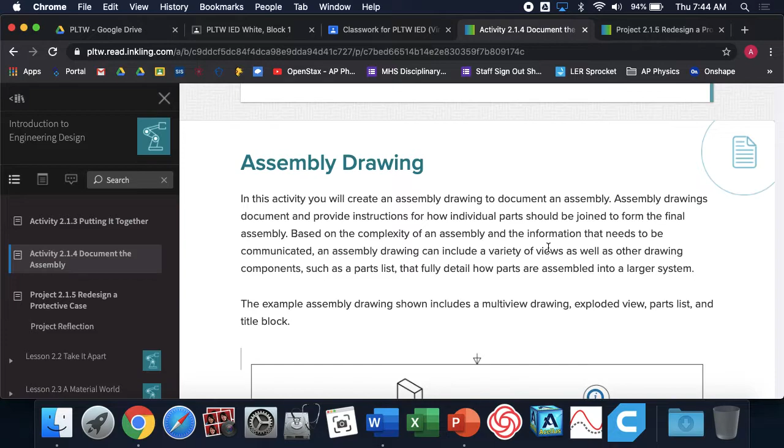So again, I'm going to condense all of the MyPLTW instructions for 214. I'm going to just summarize it for you and show you what you need to do. So you're just basically showing us how to do it today, and that's it? Yes. Then I'm going to ask you to do it, right? I'm going to show you, you'll repeat it.

This is why we should have no excuse not to have late work done. I know, I am doing everything I can to help you guys out. And we have a study hall. Yes.

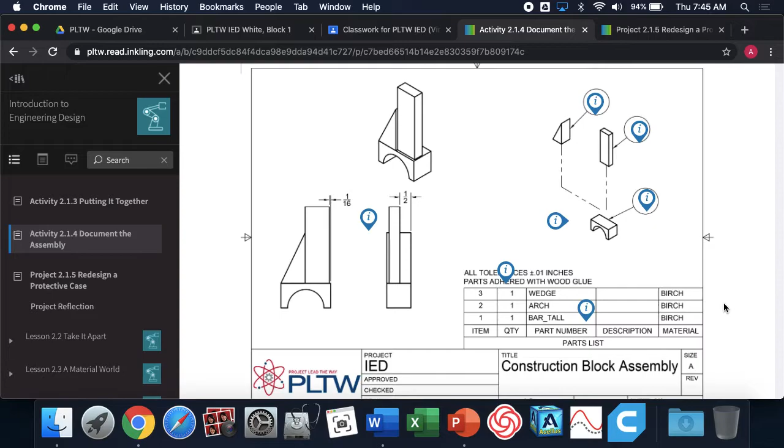If you ever need help, just email me. Mr. H, can I come in tomorrow? Get help. By all means. You can come in and probably spend 10 minutes in my room. I can straighten the assignment out and you can be on your way. Please use that time to come in and get help, get your work done.

So today, this is what we're going to be creating. This is a part drawing, but of an assembly. This kind of looks weird. Huh? This looks weird. Yeah, it's not too bad. The first thing you'll notice, there's multi-views of the assembly.

Well, that's exactly like we're used to. It's just no longer a single part, it's an assembly of parts. We got our front view, we got our right view, and then we have our isometric view. To show the audience, if I give them this, they'll see kind of what this assembly looks like.

I want you to pay attention. I still have dimensions. You see the dimensions on the left side with the multi-view? What is this dimensioning? Is it half of the square on the bottom? Yeah. Is it dimensioning a part dimension?

This half inch is not any part of it. It's the spacing of that part. I'm telling you, this block, the back side of it is half an inch away from the back edge of the other two blocks. These dimensions are the location of the parts.

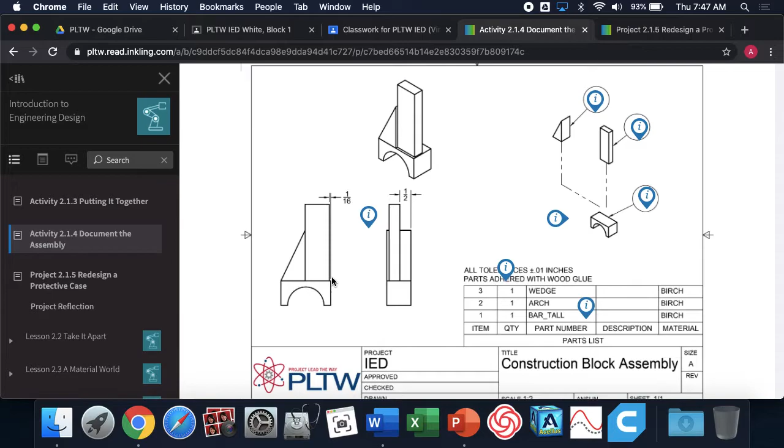That's the first half of it. Over here, does anybody have any idea what this view is called? I don't expect you to know, I was just curious. No, not quite. This is something new.

This is an exploded view. You can tell because the parts that were assembled look like they were exploded outwards. This view shows how the pieces are put together. This block I'm going to put straight down on the base block. This block would come over into the side and attach. It basically blows your part up into all the little pieces so you can see all of them, and then you can also see how they end up getting fit together. So we're going to learn how to make this exploded view.

Down here, this table, you see how it's got part numbers that correspond to the part numbers of your assembly? This is called your bill of materials, or your parts list. In Onshape, they refer to it as BOM, bill of materials. It lists the part numbers and the name of it, and then it labels them on your assembly.

So someone can say, what the heck is part number 1? Well, part number 1 is a bar, tall, made out of birch. You're like, what's this bottom part? Oh, that's the arch. It's also made out of birch.

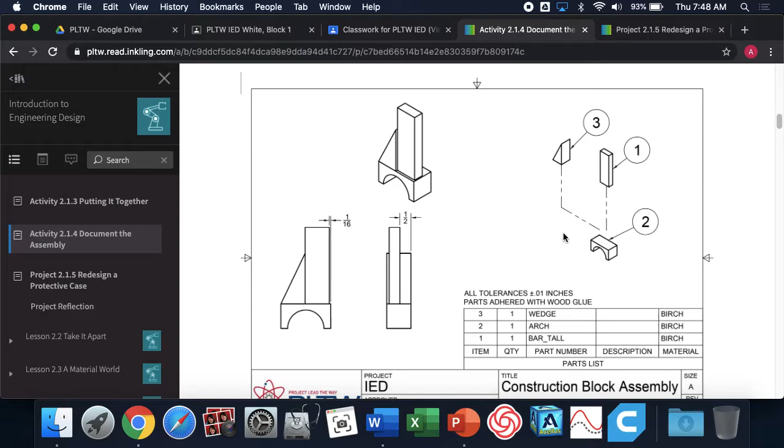I'll show you, don't worry about it. This is the goal for today. You guys are going to be learning how to make this. And I'm going to show you right now how you do this, how you make it look like this in Onshape.

So what I'm going to do is log in. Again, I don't really want you to try and keep up with me. I'm going to go kind of quick and show you where the buttons are and how to do it. And then I'll have you do it yourself. But you'll start with obviously logging into Onshape.

Once we're in Onshape, I'm going to use the selfie stick assembly as an example. What you guys are going to do is get with your partner and work with them using your headphone case. That way you only have 2 parts to assemble, so yours will be a lot simpler. I'm going to do a full-blown version, which is actually kind of annoying for the selfie stick. You can just do it by yourself, it should be pretty easy. If there's problems, let me know after we do work time.

So what I'm going to do is open up my assembly. This is the selfie stick assembly that we made, and I'm going to give you the example using this assembly. The first thing I need to do is make a new drawing. I'm going to use my PLTW template, and it's going to be a blank view, because it's not a part — it can't just spit out the 4 standard views.

And it's asking, what do you want to place a view of? See, there's nothing listed — that's because I'm looking at parts, I'm not doing a part drawing, I'm doing an assembly drawing. My assembly is in this document, so I'm like, yep, I want that assembly.

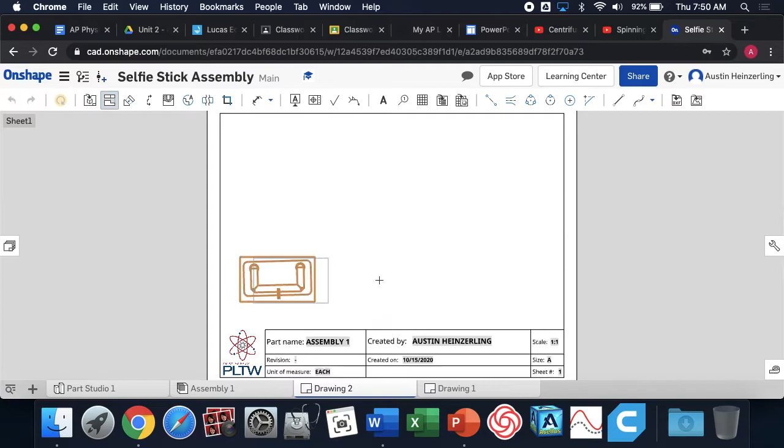I'm going to place a view right here. And then this gets really annoying — there's my side view. Obviously my part is too big for the document. So if this ever happens to you guys, just right-click on the view, go to View Properties, and you've got to change the scale. This image is the exact size that the dimensions are.

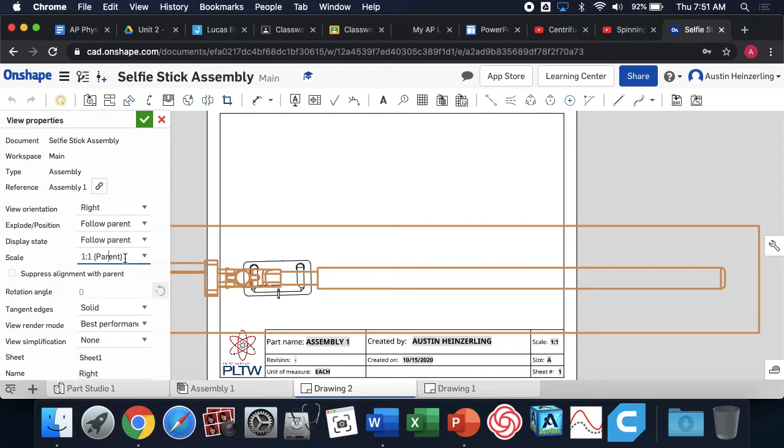It's huge, so I'm going to cut this down to a 1/4 scale. This will be useful in the future if this ever happens to you.

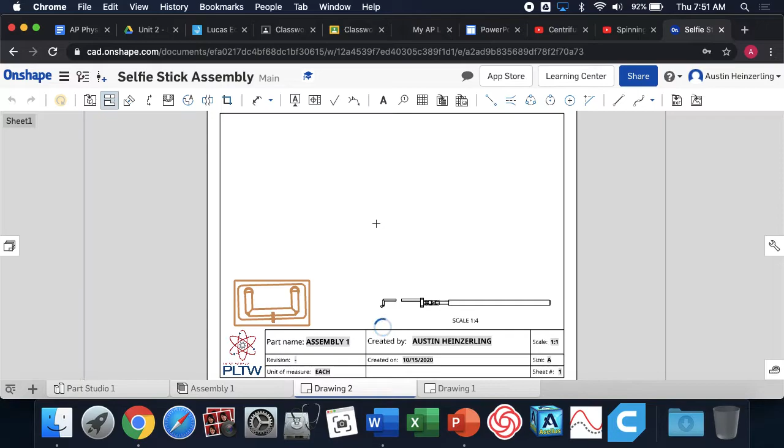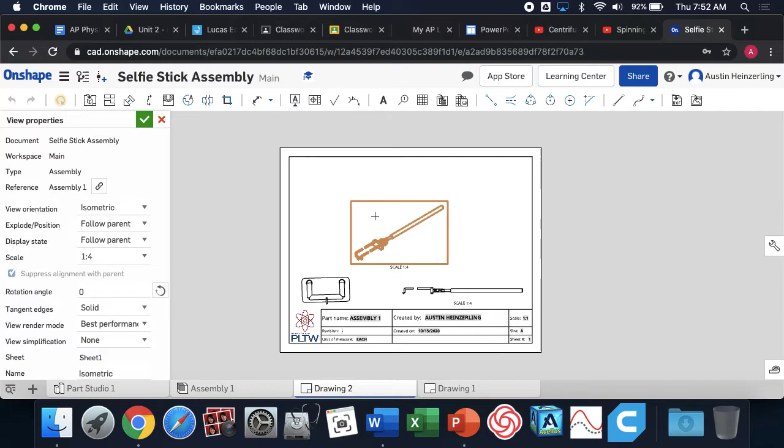And then the main view I need is an isometric view. So I need to insert a projected view using this — I'm going to drag diagonally. There's my isometric view, but it's also much too large. So I need to right-click, view properties, and I don't want it full size, 1:1 — I want it, let's say, 1/4, right, 1/4 of the size of the actual part. I'll confirm that and move it up here.

So I've got my multi-views placed. I want to point out on Classroom, this should have populated your assignment.

I summarized, I gave you some resources, I'm going to show you what I need in your drawing. Right now, I have the multi-view. I'm done with that. I need dimensions to specify the positions on my multi-view.

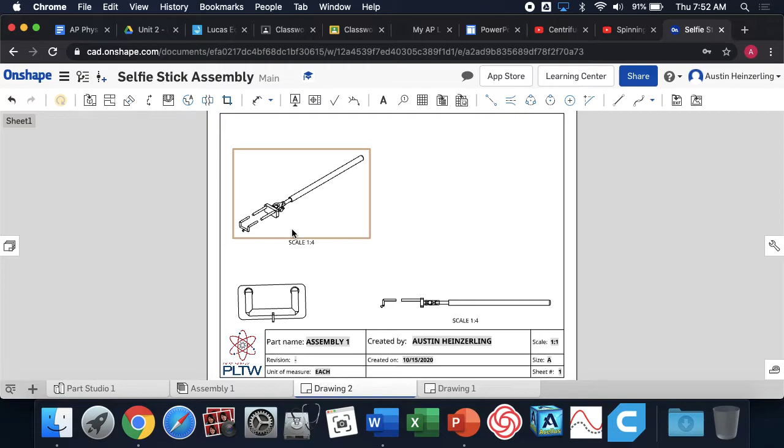Now, I'm only going to do a couple because this is actually a really complicated assembly to do all these little dimensions. For example, over here, I'm going to dimension and say the end of this component - I want to start by assembling it over here, 1.105 inches away from the base of the handle.

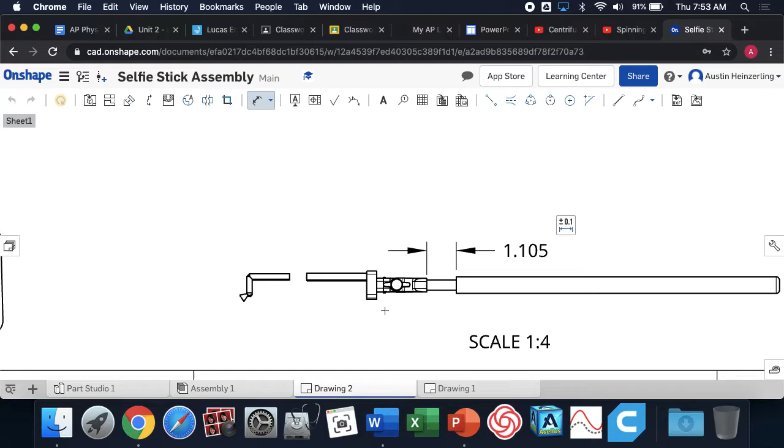I'm telling you, when you assemble it, you should locate these parts in this way, put them this close together. Again, this is a really hard one to dimension. Here's a good example: where should I assemble this slider, the bracket.

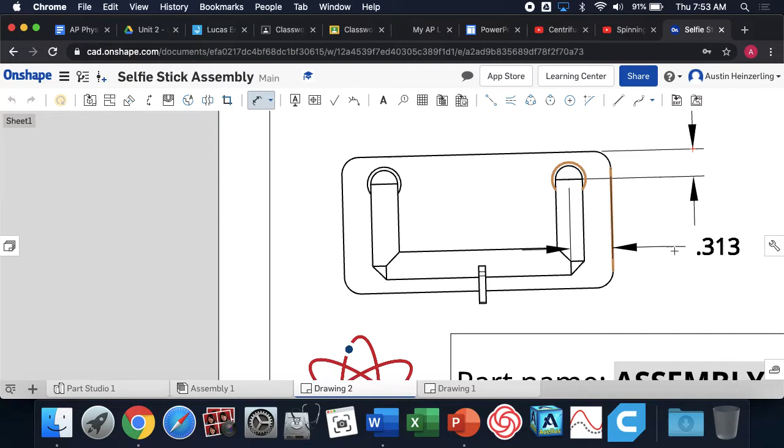I'm going to specify the center of that - the holder for the phone should be 0.2 inches away from the top. And it should be, I have to do it up here, 0.313 inches away from the edge. That tells me where to locate that part and then assemble it.

Does it make sense that I'm not dimensioning the part, I'm dimensioning the location of the part? When you guys do yours, give me at least a couple, you don't need all of them. If yours is complicated, just give me a couple and show me that you know my dimensions need to be the location of my part, like how far over it is, how close it should be, things like that.

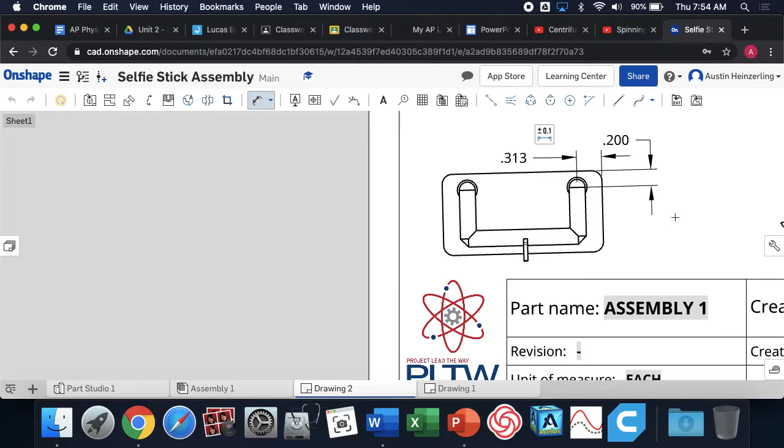All right, so I'm going to leave it at that. I just want to give you an example, but I've dimensioned some positions of my part. So I'm done with that. Now, I need an exploded view. This is something new. To make the exploded view, I need to go back to my assembly tab.

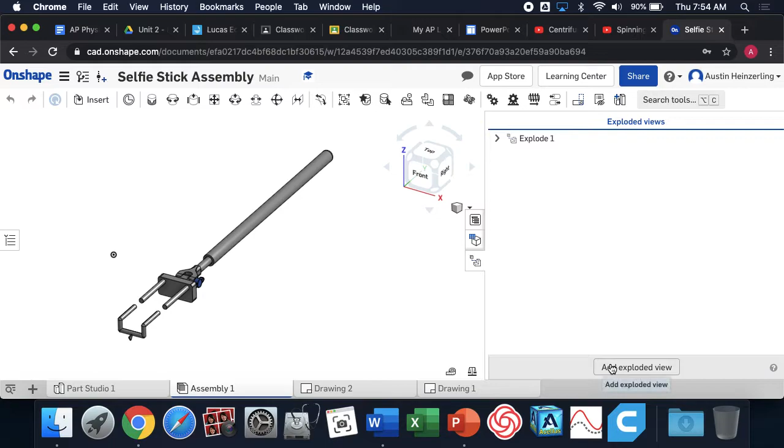In my assembly tab, on the right side, there's 3 icons that we've never used. On the bottom, it's exploded views. If I open this up, I can add an exploded view. Do you see this gold bar that popped up? This gold bar is indicating you're in exploded view mode, you're creating an exploded view.

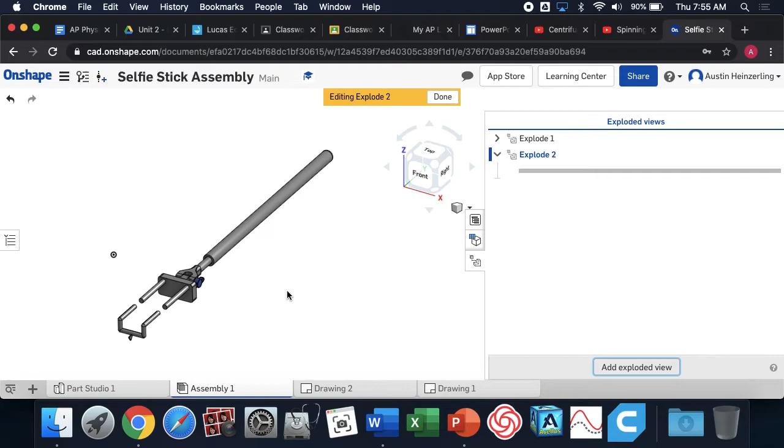What you do is you basically take all the parts and you drag them away, and you essentially pull all the parts apart. So what I want to do is select all of these parts - see if I can select them all. Yes, I want all of these parts. I want to slide them out.

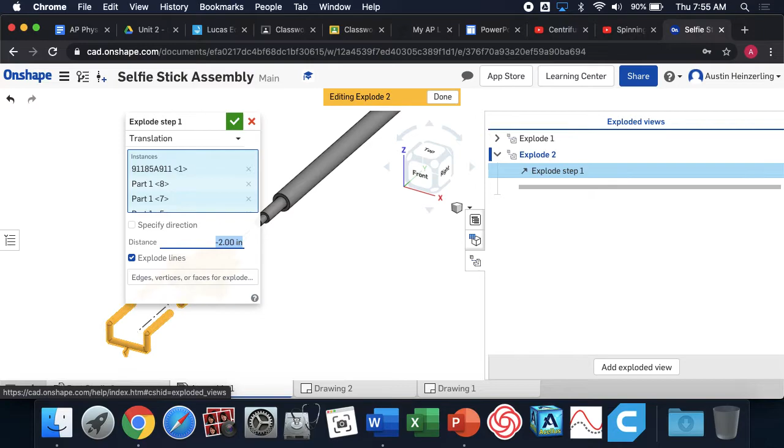After you click and drag and move the parts, you basically pull it apart. It'll ask you to confirm, hey, do you want to add this as a step to your exploded view? And you can even get really specific if you click and drag - that's the easiest. I say yep, that's the first step. Do you see how it's now disconnected?

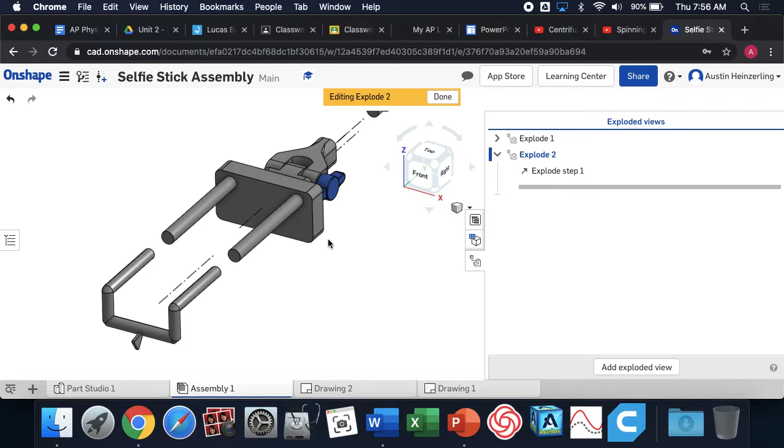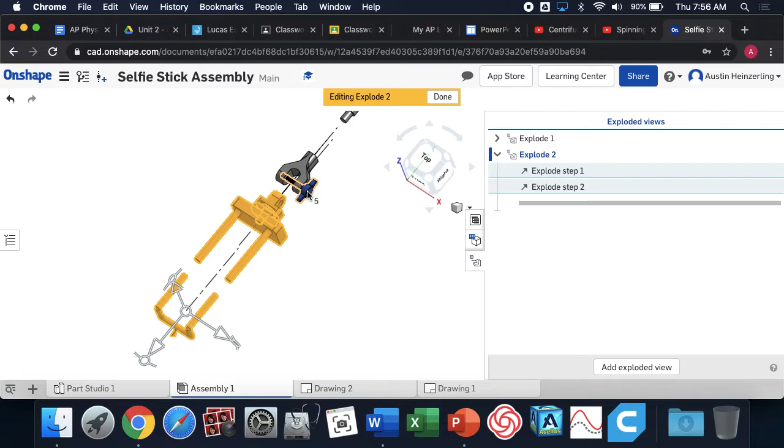I've pulled all the end pieces off of the assembly. I'm going to leave the handle and the slider together because I'd have to pull it all the way out. So then that's what I want. Now I want to keep going, and I want all the rest of these parts. I'm going to pull all of these out again - that's my second step. I confirm that. I say, oh, I got to disassemble the screw.

I'm going to pull that out to the side, out of where it's actually assembled. I'm going to confirm that step. I'm basically going to just pull all these parts, all the pieces apart, and drag that apart. Confirm.

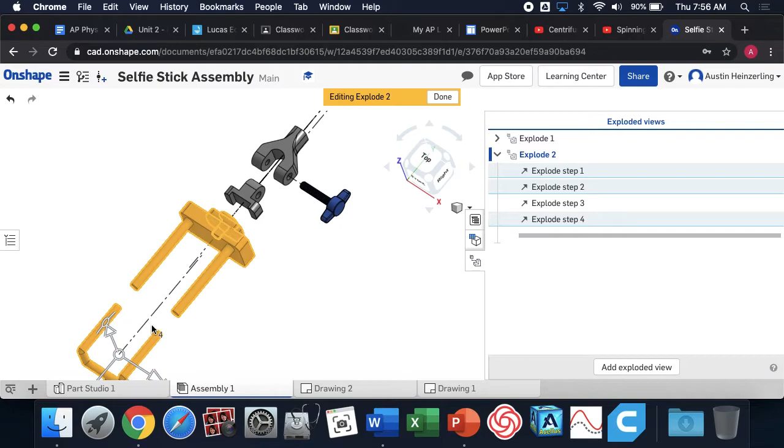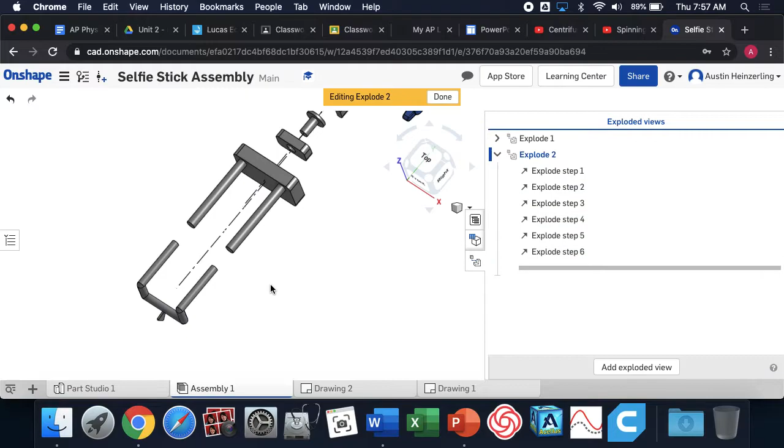I want all these parts - pull it away from the pin. Confirm that step. Got 2 more that I'll drag apart. Confirm that step. Then this one is actually done, but I'll click this, drag it away, and confirm.

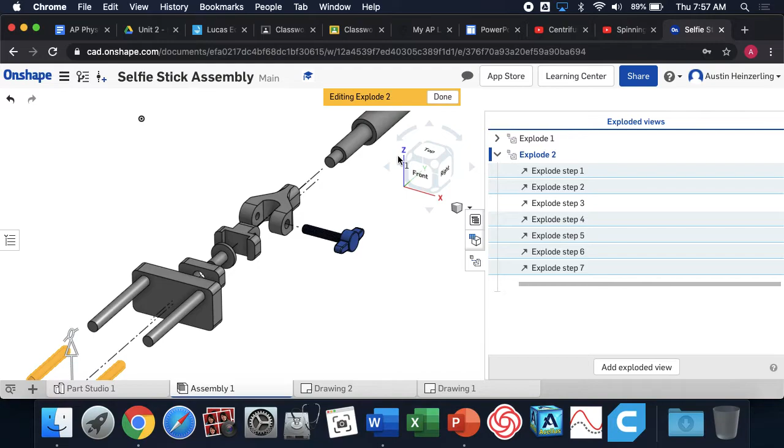Do you see that? I basically pulled my assembly apart. That's what you want - you want to give spacing between all the components and show how they fit together. This will help people understand how this assembly is made. When I'm done, I'm going to click done. That gold bar goes away, and I'm back into normal assembly view.

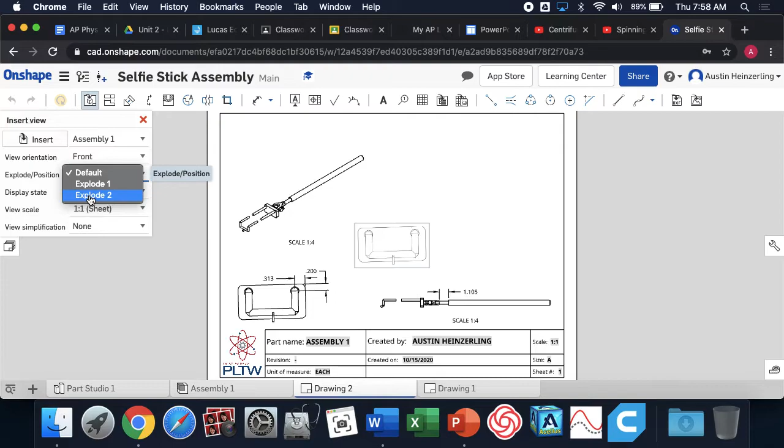My exploded view, the one I just made, is now updated to my drawing file. So I want the exploded view. Do you see how it has the front view? It's taking the exploded view I made but looking down the front. That's not useful for me. All exploded views will almost always be isometric.

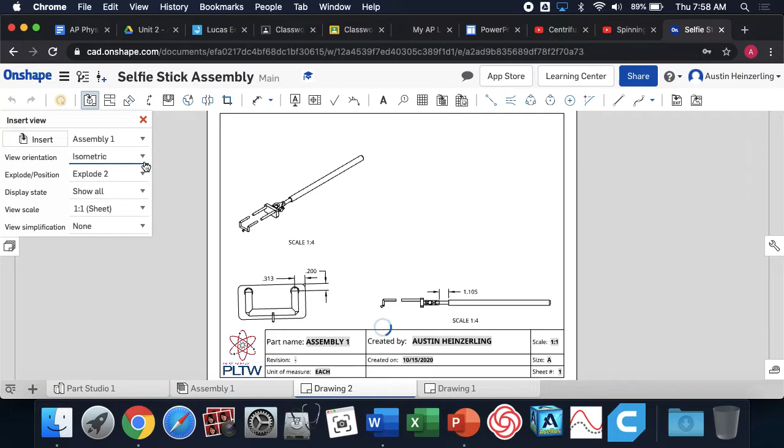That's far, far too big. How do I fix this? How do I make it smaller? Properties—right click, view properties, and it's the scale. I need to make it smaller. I'll confirm that. That is my exploded view.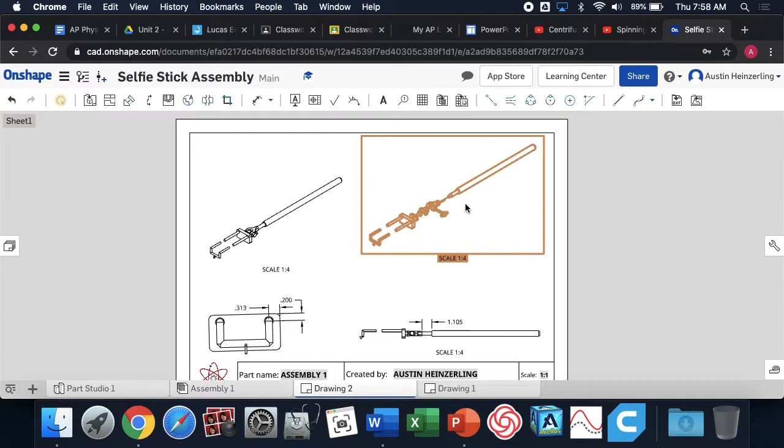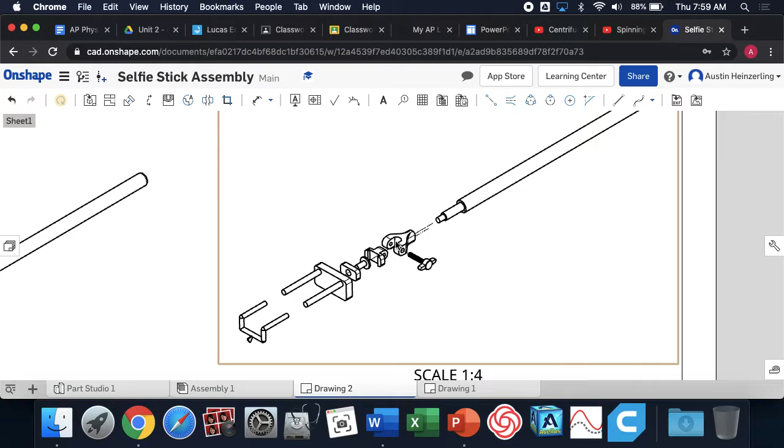Does everybody see that? I had to shrink it a lot. It doesn't show up very clearly, but it fits now. Do you see how all the parts were pulled apart? You can see, if I take this, push it, push it, push it, all the pieces will assemble. Then I got to push this screw in.

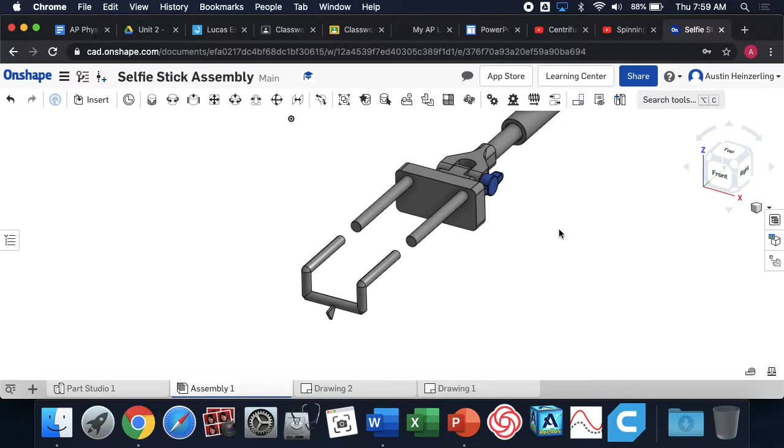What I need to do is go back to my assembly view. Again, a good shortcut to know—if I don't want to mess with zooming all the way out, I click the F key, and it'll zoom out so that your object fills the screen.

On the right side, it says Bill of materials. Notice it's already got the part numbers listed. When I hover over, you see how that part is highlighted in gold? It shows you the parts that you added in order, and it'll highlight what that part is.

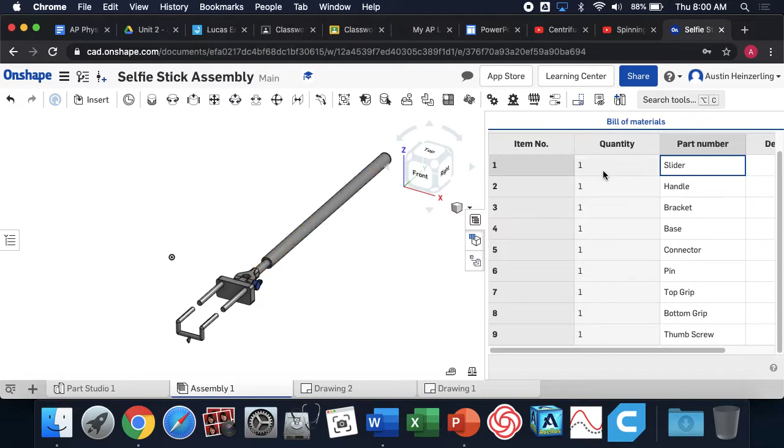Now, I've already gone through and edited this. I look at part 1, I'm like, I need to name that. I don't want it to be just 1. That's not useful. I'm going to add a part number, or you could add a description—it doesn't matter.

I literally typed in 'slider.' I described the parts. So what you'll need to do is go through part by part and add a part number or description, it doesn't matter which box, to label the part. That way a human can understand what that part is, not literally just a number.

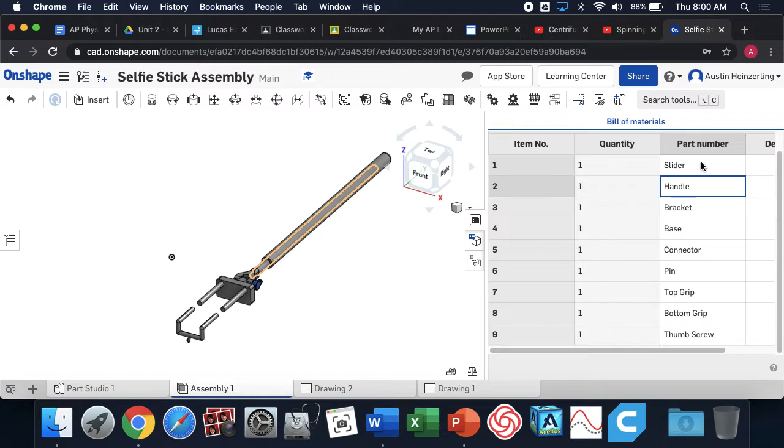Once you do that, you go back to your drawing. Mine errored out again. Typically this should be gold, and you'd click it to update that new information. It'll update it so that you can use it. It happened to me last time—I had to refresh my browser, and then it would update the information.

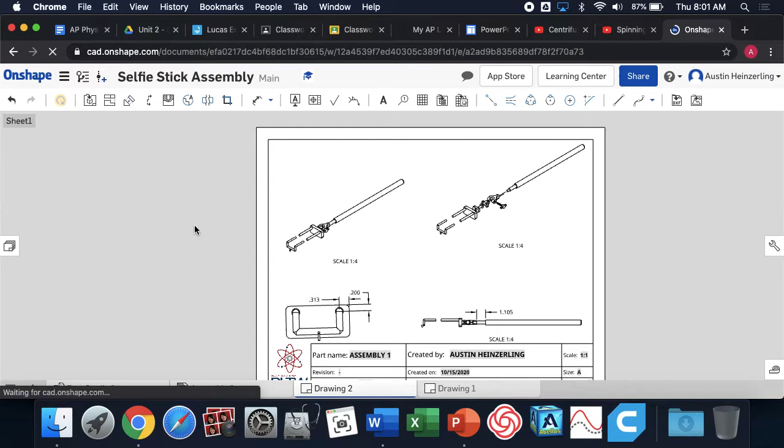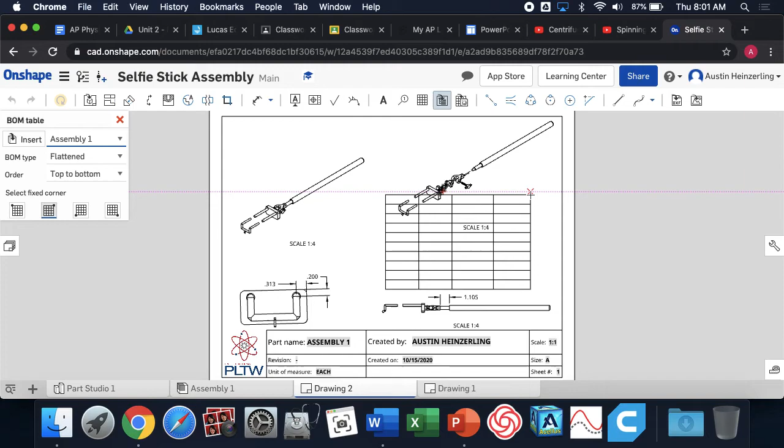When this comes back up, what I need to do is insert my bill of materials. There's a button for it—right here, BOM table. It'll pull the bill of materials from your part list that you had just made. I'm going to have to move some stuff big time. Actually, I'm going to delete this view—it's just in the way.

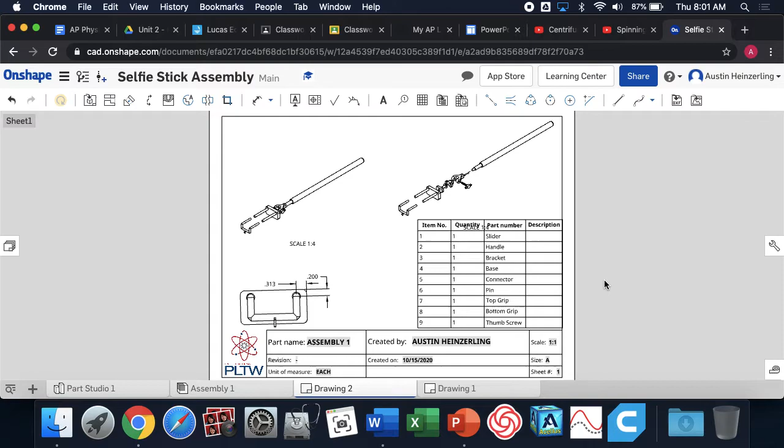Do you see how it pulls it in automatically? It knows the number—it defined what's part 1, what's part 2, and I added my descriptions. So someone can say, part 1, oh, that's the slider.

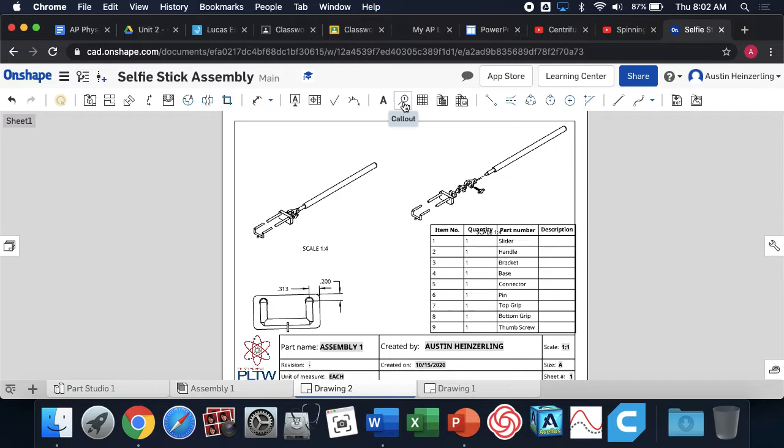I want to point back—I've got the exploded view placed, and I have the parts list, aka the bill of materials. I'm missing these balloons. Those are really easy to put in—you use the callout feature. What you have to do is zoom in and click an edge of the part. If I try to click in the empty space in between the part, it won't work. I need to find just some line on the part.

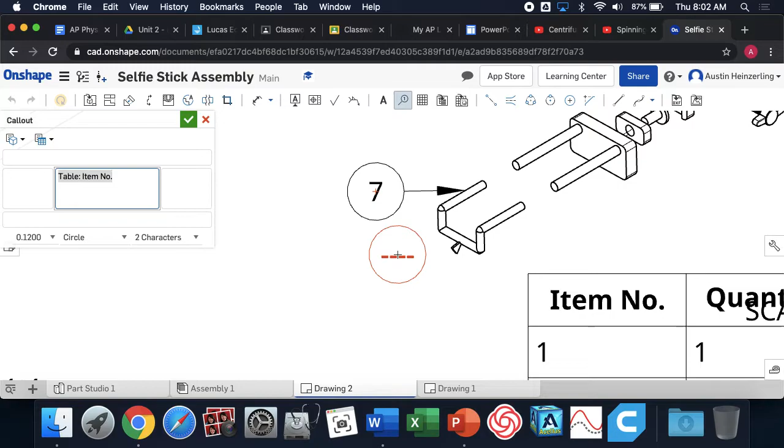Boom. It knows that that's part 7. It's got all that documented. So you're just telling it, hey, display that this is part number 7. And then someone will go and say, part number 7—oh, that's the top grip. That makes sense. And then you have to make sure that you just label all of your parts.

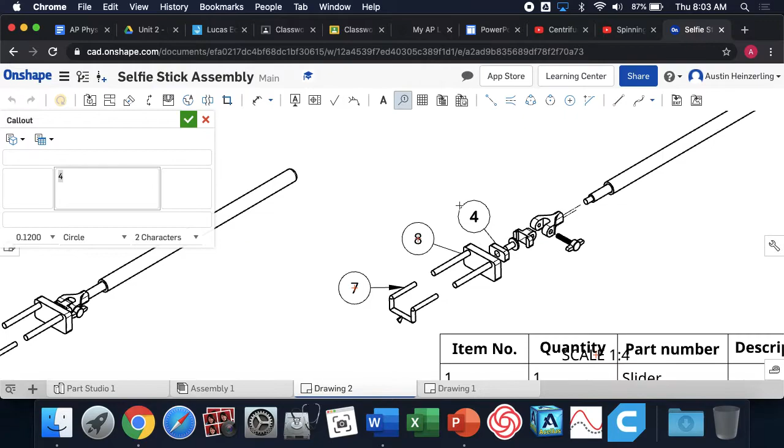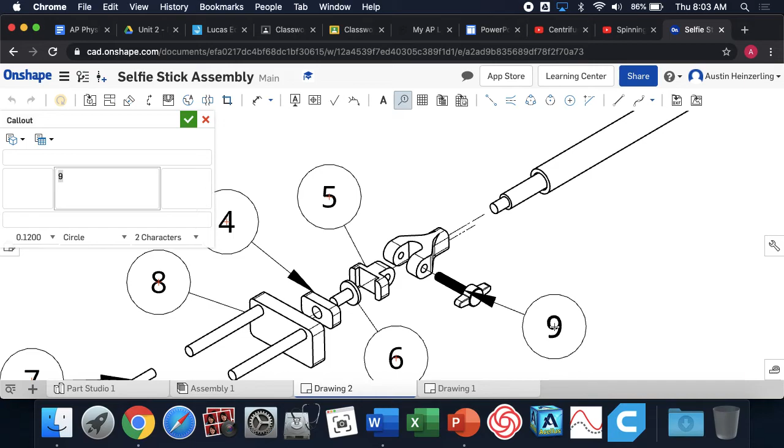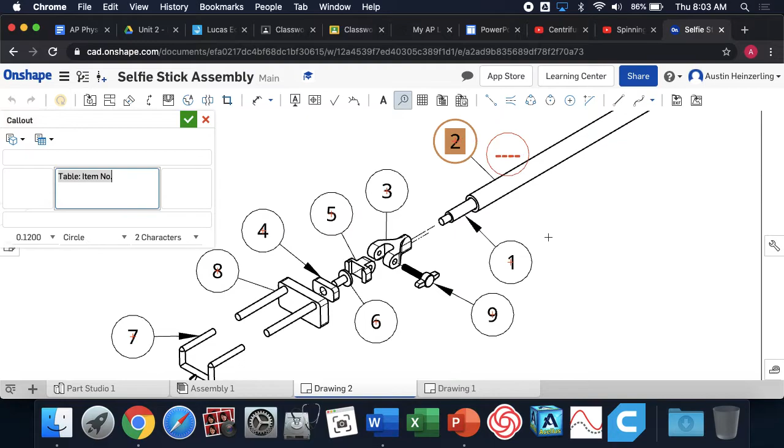That's part 4. I'm going to try alternating. You literally are just clicking. I don't want that one. It's nice to click the very edge so that arrow doesn't overlap. Three. One and two. Boom. I'm done.

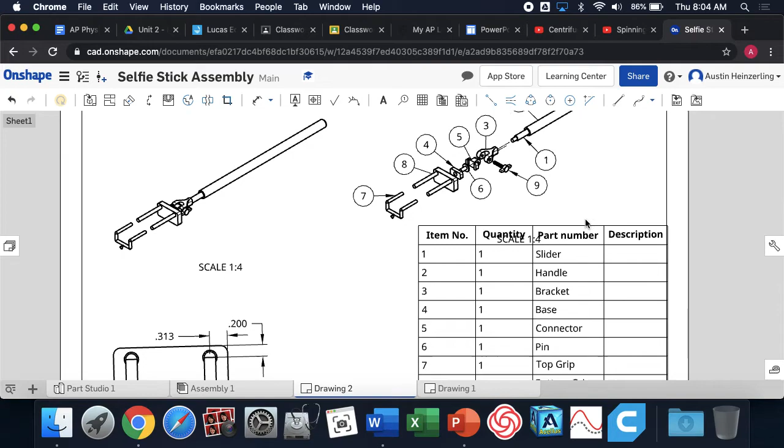The callouts identify what part is what part number, and then they go to the bill of materials to say, oh, part number 7 is the top grip. You could add material, you could add descriptions. And then I've completed everything: I have the multi-views, I dimensioned the part location, I made the exploded view and put it in my drawing, then added balloons to identify what parts are what in my exploded view, and added a bill of materials after editing the part names.

This is all I'm going to have you do. Print a PDF and save that and submit it to Classroom. That's all I need you to do today.

You're going to work with your partner from Project 137, the headphone case you designed. Get those two parts, assemble them. It should be like one joint that you make. Then go through this process that I just did: put some multi-views of the assembly, make an exploded view, put that in, balloon the parts to label them, make a bill of materials and put that in, and then add some dimensions for the location.

Done. You guys are going to work with your partner. You only need to submit one assignment. If Brody and Trevor are working together, they're going to work on it together and help each other out, but maybe Brody is doing it and submitting it. When Brody submits it, he's going to add a comment like Brody and Trevor. That way I know Brody and Trevor get credit for this submission, and I'll give you both points. If you forget your partner's name, I can't give them points. So make sure you remember to put your partner's name, and if you're the partner, make sure you have them list your name in the submission. That way I can give you guys points.

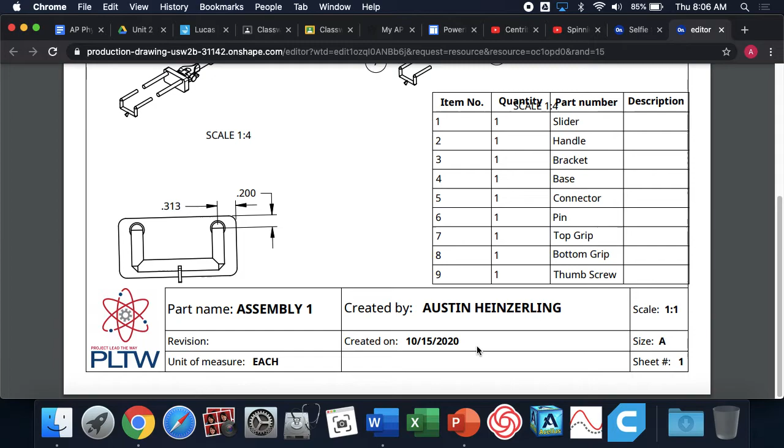All right, I'm going to turn you loose now. I'm going to be around to help you get started. If you have questions, let me know. If you didn't do this project for some reason, or you don't have parts to assemble, I can post two random parts that I just need you to assemble, and then you can do this whole project and show me you know how to do this. So if that's the case, just raise your hand and let me know, and I'll come help you with that. Any other questions before I turn you loose?

My partner was the one with technical issues, so we don't have a lid.

Okay, I can send you the parts that I will have you do just so that you can complete the assignment. It's two easy parts. I don't really care about the assembly itself. I care about, can you do this? Can you make an exploded view? Can you make a bill of materials? Things like that.

Okay, so any other general questions about what we're doing? Okay, I'll get you parts. Just give me a moment.

Virtual students, if you did the project yourself, you are going to use your two parts, the case, the bottom and the lid. If you worked with a partner, which I don't think any of my virtual students did, otherwise you're going to be just doing it yourself. It won't be that bad at all.

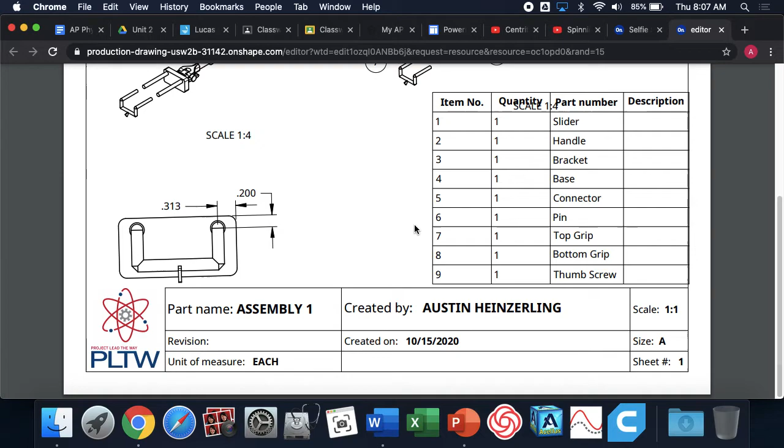If you didn't, virtual students, I'm pretty sure that in your assignment I added the two parts that I want you to assemble. So if you didn't do this project for some reason, you're going to use these two parts. Download them to your computer, go into Onshape and upload them so you can use it. Assemble those two parts. It should be literally one mate to connect them. And then you go through this exact process that I just showed you with that really simple assembly.

Any other questions in general? Again, I want this done before we leave, so you guys have like an hour to do this. It shouldn't take you an hour. I want you to crank through this. And then any time that we have remaining today, it's going to be your free time.

Both yesterday and today were light days, and this is, I guess, my treat to you guys for heading into fall break. All right, so I'm going to go ahead and stop the recording.

Again, virtual students, I've listed your instructions here. If you didn't do the project, use these two parts and make a simple assembly, and then follow along with my video instructions I just did to complete this activity. And make sure what you're submitting is a PDF document of the assembly drawing with all the parts that I list in the submission requirements in Google Classroom.